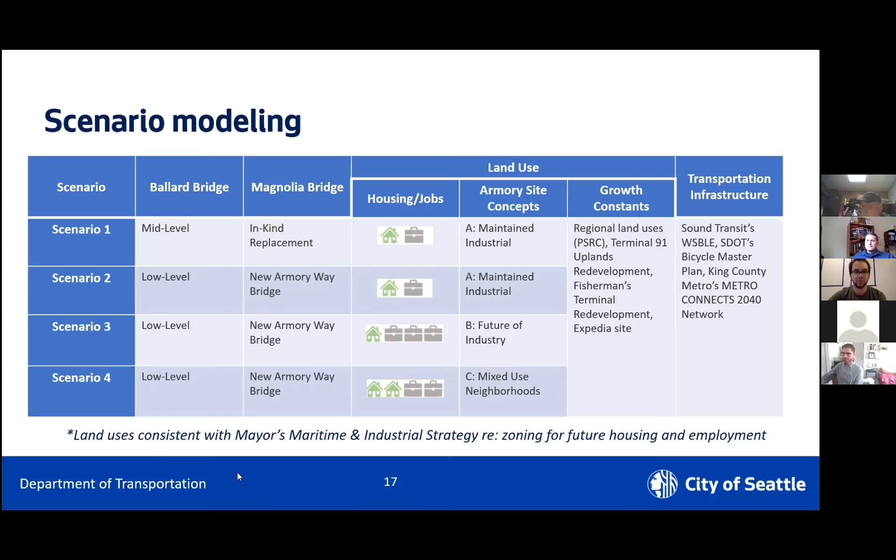Thanks, Diane. And Kendra, thanks for that quick overview. Eric, really appreciate you sharing the port's perspective on this as well. I think that's a helpful way to also frame what we're seeing in terms of the draft transportation recommendations. So Tom, I'm going to turn it over to you to walk through these recommendations, and then we'll have some more interagency team discussion as we go.

Yeah, thanks, Jennifer. And I'll be fairly quick on this section, since we have spoken with the IAT about a lot of what's here in our last meeting or two. Just kind of a heads up for when you get the report and have a chance to review that.

Within the recommendations chapter, we've bucketed recommendations into what we're calling key investments. This includes both the bridge options as well as some of the key multimodal investments that really rose to the top in terms of priority and need.

Because there's a lot of interest from specific modal stakeholders, both public and private, and because what we're really trying to do here is build a set of quality modal systems, we also present the recommendations by mode. So there's a bit of repetition in the report, you'll find, but we thought that was important so that a bike advocate or a freight advocate can look at the report and really understand how the BIRT recommendations are set up to improve or protect travel and access for that particular mode.

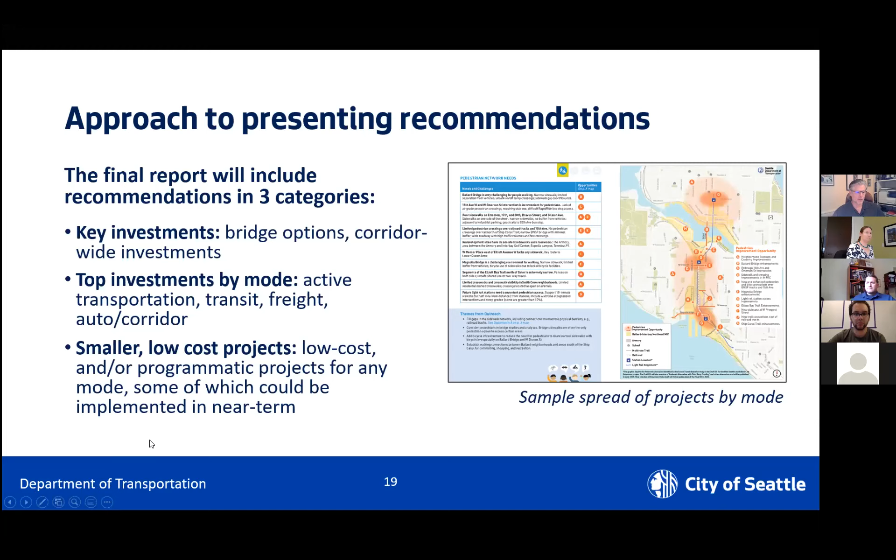Again, I think you guys have been through this process with us, so just a quick reminder that the recommendations in the report really come from a deliberative process where we started with a very long list of projects, worked closely with you to develop goals and clear evaluation criteria, worked through that technical process, including input directly from the IAT, as well as the public and various other stakeholder groups that we've been informed by. So the results you'll see in the report are reflective of what we feel to be a good process and a lot of both technical work as well as stakeholder and public input.

One of the things we wanted to be abundantly clear about at this point, since at the outset of this project there may have been some expectation that we would land with a single recommended replacement or rehab alternative for each of the two bridges, Ballard and Magnolia bridges. We did want to be clear that the report, as it's distributed to the legislature and the city council, and your various leadership, will continue to carry forward two alternatives for each bridge rehab or replacement.

As you know, planning studies have been either completed in the case of the Magnolia Bridge or are still underway, nearing completion for the Ballard Bridge, that looked at a range of alternatives, up to four alternatives for each replacement.

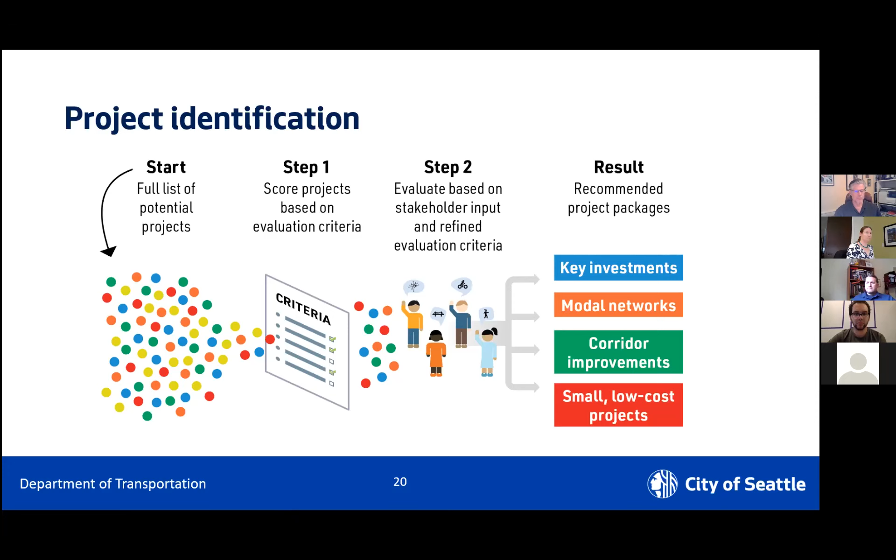So as we talked about in the past, the report is set up to talk about some of the trade-offs between each, and describe how the other suite of multimodal projects may or may not be related to these two alternatives. That may be a question in people's mind. We did want to be abundantly clear about that as you get the document to review and understand the context of the recommendations.

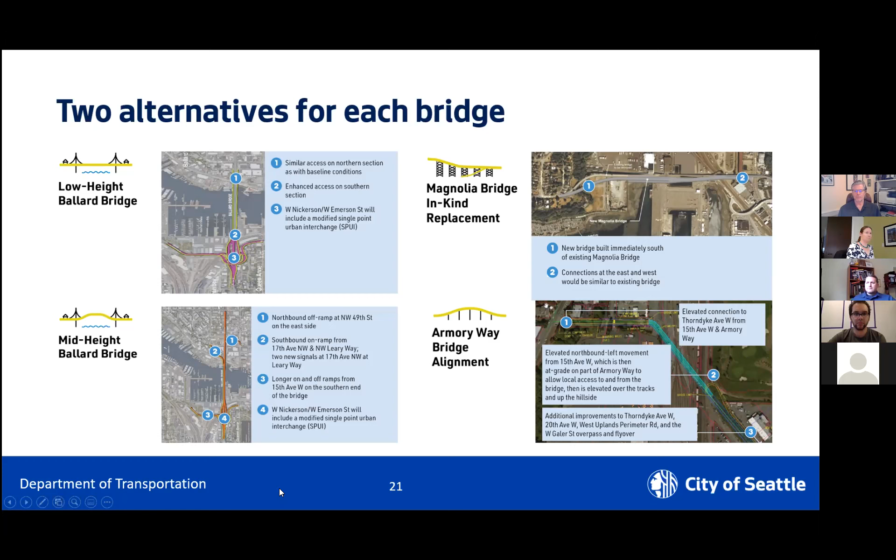Certainly the pedestrian improvements around the future station areas are critical. And while those station area projects may seem a bit far out yet, we know it takes time to implement some of these projects. So it's certainly worth planning for and beginning to make some of those pedestrian and bicycle improvements prior to the light rail project.

A couple of the key corridors that were really stressed through our technical and public process in terms of roadway improvements, which are really more comprehensive pedestrian quality and experiential improvements along more significant corridors, include the 14th Ave Northwest corridor, which will obviously be a really important corridor for pedestrian access to the Ballard station, where a lot of walk-up access is expected in a fairly dense neighborhood. And then also along the 15th Ave West corridor.

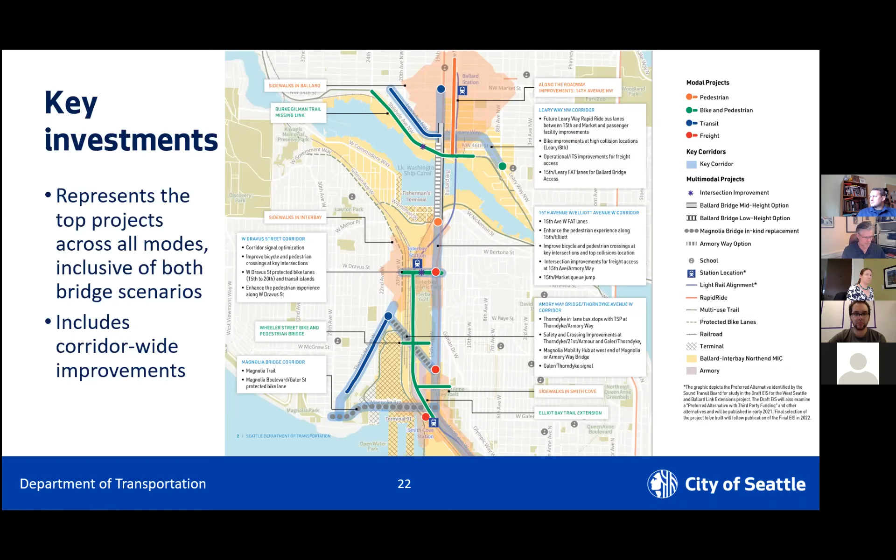Just quickly, to frame up how some of the bike and ped projects are framed, again, really focusing on those 10-minute walk buffers of the light rail stations, emphasizing some of the potential improvements along Dravus that could benefit cyclists and pedestrians.

One recommendation that the Fehr & Peers team evaluated quite extensively and thought would be beneficial to not only street operations, but to bikes and peds is the idea of a roundabout at Dravus and 17th Ave.

Talked about the Elliott Bay Trail extension. Another thing that came up extensively, which we want to emphasize in this plan, is the need for better ship canal crossings for cyclists. The plan includes two options: improvements to the Ballard Locks connection that would allow 24-hour cycle access, and what could be an interim or phased improvement to one of the Ballard Bridge alternatives, which is expansion of the deck to include a full-width bicycle facility crossing the Ballard Bridge.

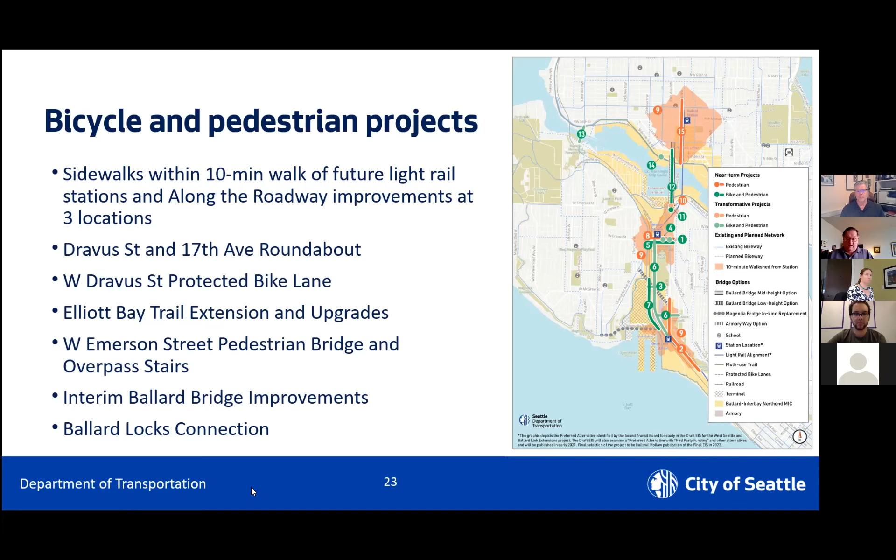Jeff, you want to jump to the next slide? There you go. So again, in terms of some of the key transit and freight projects, 15th Ave Northeast and Market is an area where we see a lot of congestion, so we're looking at some queue jumps for transit there.

Building on some of the work the city's doing on Route 40, those bus lanes we talked about, there's a few transit improvements that would be tied to the Armory Way alternative along Thorndyke, both for transit priority as well as connectivity to those modes. We talked a bit about Dravus as a corridor that really could use reliability improvements, so we're looking at both signal operations as well as potential for a longer-term bridge replacement.

We continue to move forward with the recommendation of freight and transit lanes on 15th Ave West as an opportunity to provide some priority for trucks along that corridor, shared with transit. And then there's a host of intersection improvements that could include signal opportunities to improve both freight and transit throughput.

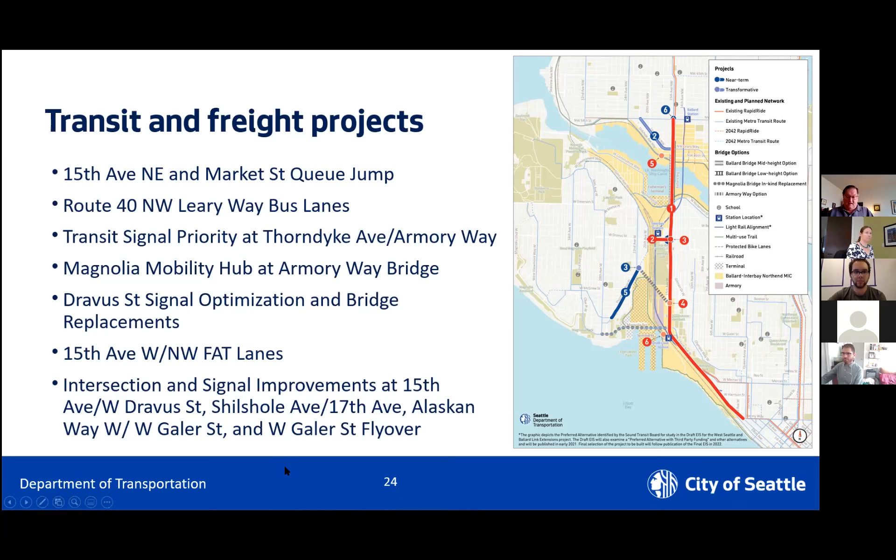And then I think we talked a little bit about some of the small, low-cost projects. I won't go through these all in detail, but a lot of these bring a little more specificity to some of the pedestrian crossing, safety, and signalization improvements within the station areas, as well as along some of the more heavily trafficked corridors where crossings can be challenging, like 15th Ave West.

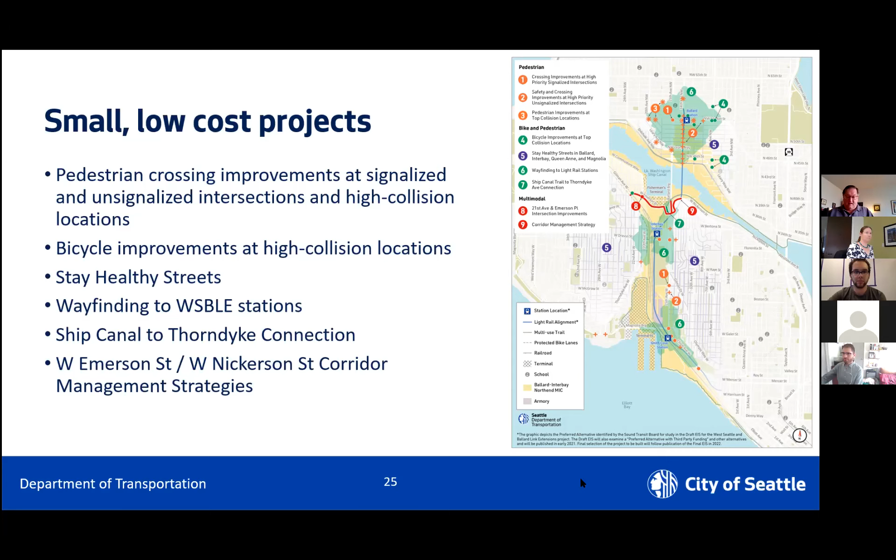And then, one corridor that we included in this small, low-cost category is Emerson Nickerson Street. This is obviously an important corridor for freight and goods movement, and there's a series of smaller ITS and signalization projects that, in combination, could really help improve freight reliability along this important east-west corridor.

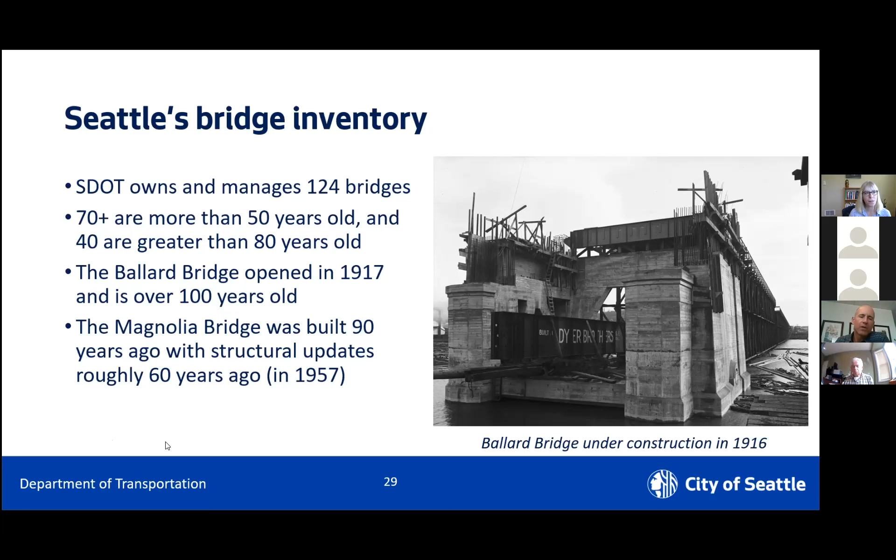Obviously, on top of that, nobody would have expected that the West Seattle High Bridge would be closed at this point. That is an emergency condition for the city and many of its partners. SDOT is putting a tremendous amount of resource into working to find a solution either to repair or replace that bridge, and that will put a tremendous amount of funding stress on the city. The city's already had to take out a $70 million interagency loan to pay for some of those activities and does not have funding identified for that repair or replacement. So it is really hard at work identifying solutions for paying for that important water crossing of the Duwamish.

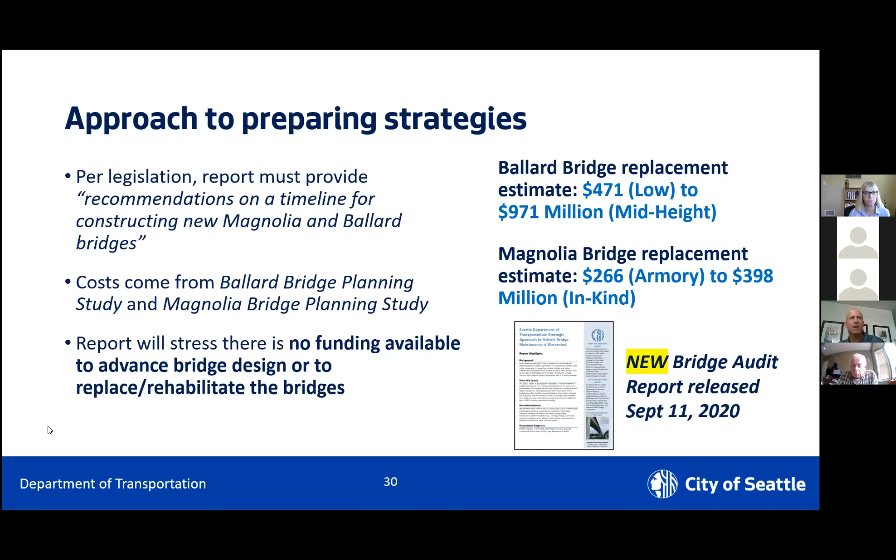So all that's a little context around what we're doing here in the BIRT study, which per the legislation is to provide some recommendations for both a timeline and a strategy for funding the replacement or rehabilitation of the Magnolia and Ballard bridges. And again, these are very expensive capital projects. I think if you look at the typical types of major infrastructure projects that the city has dealt with over the last decade or two, there's very few that rise to the level of investment that is required based on either the Ballard Bridge or the Magnolia Bridge replacement costing in those planning studies.

Then there's quite a bit of engineering work, often split up into three or four different phases: 30% design, 60% design, et cetera. There's an environmental process that would run parallel to that engineering. There's a process to bring on contractors for construction. There's right-of-way acquisition—often even with bridge replacements, different ramp locations, different bridge sizes, expansion can still require acquisition of right-of-way. And then there's the process of actually building or rehabbing, but sometimes that's the lesser of the time to get through these processes.

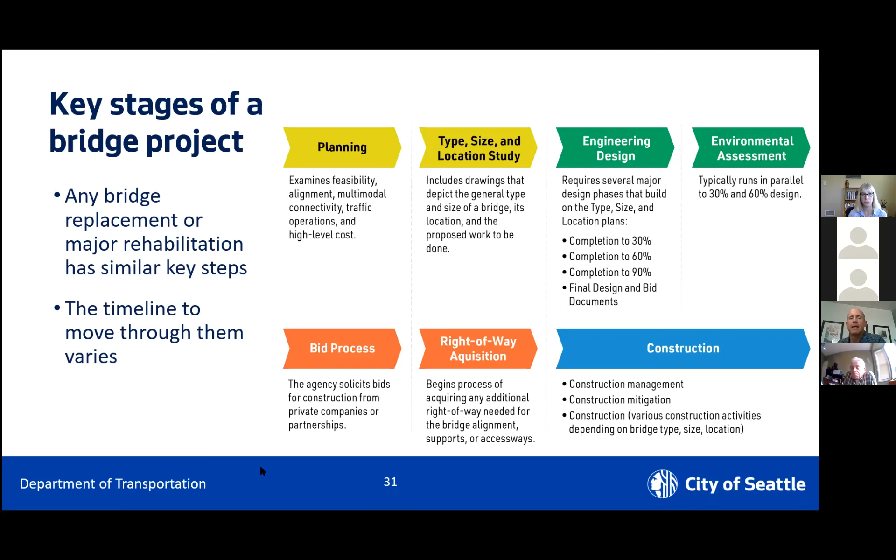So as we look through this, we'll show you some graphics that we're working on to demonstrate cost and time frame for each of the bridge alternatives. I think it's important to recognize that there are some differences between the two alternatives in how or whether it's possible to phase the replacement or rehabilitation.

With both sets of options, there are certainly some differences. With the Ballard Bridge, the mid-level alternative is a full replacement of that bridge, so that's not an alternative that can be phased. In other words, you couldn't fund incremental elements and build them. You'd ultimately need full construction funding to complete that project. With the low level rehabilitation, that's not necessarily the case.

Those improvements could be made in phases, and there's some different options for that. Just to provide some examples of what that might look like, the pedestrian and bicycle cantilevers from that bridge could potentially be an early phase of development. That's a priority out of this process.

The planned interchange at the south end of the bridge is a major component of that project that could potentially be done incrementally, and some of the bridge approaches could be built incrementally. So that certainly is a major difference in terms of the ability to fund and implement that project incrementally.

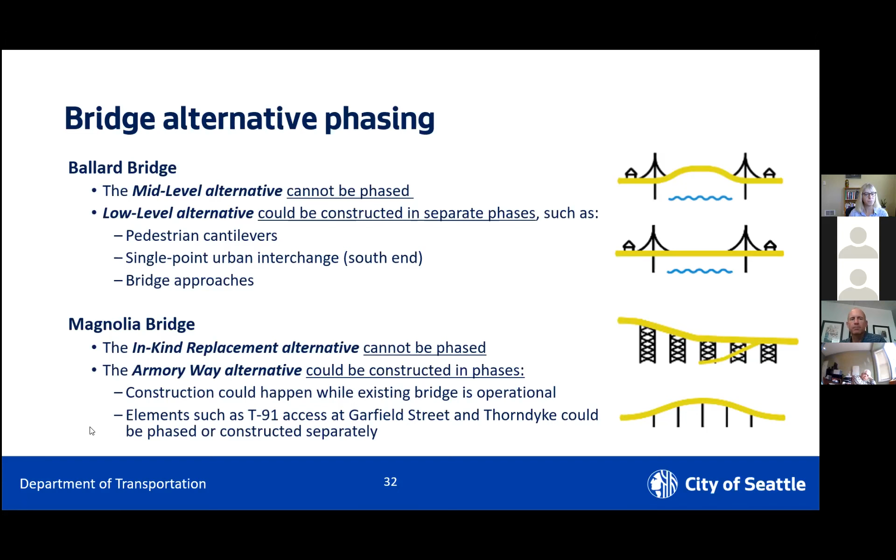Given the financial position the city's in, where there's not money for any of these phases currently, the thing to stress is that we don't necessarily need all the funding, full construction, planning and design costs to start these processes. Each of these individual steps can be funded sequentially.

For example, if we need $5 to $7 million for a type, size, and location study, that is a pot of funding that could be developed through various local and grant sources to commence that stage of work.

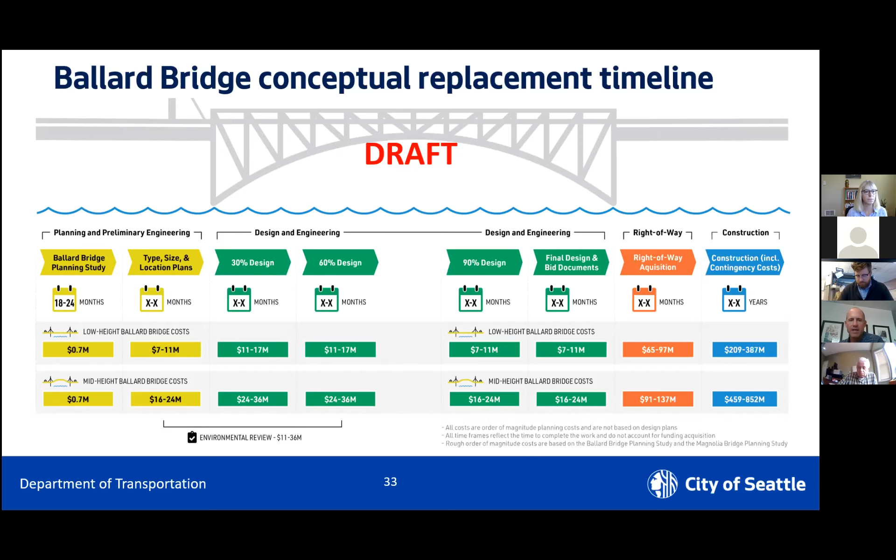Tom, one question that has come up, and I don't know if you're able to answer this, or maybe Kendra could chime in. I think there may have been a previous type, size, location study done for the Magnolia Bridge, post-earthquake, when there was an assessment of damage. Does anybody know if that would need to be redone, or any status on that? We can certainly follow up on it. I just wanted to check.

I'm muted here, I'll take that. Kendra, go ahead. There's a preponderance of studies that we've reviewed. I'm looking at all the ones we have for Magnolia. There are some of that magnitude. I can't recall exactly all of them, but as part of the study, we looked all the way back to 2000 at different documents.

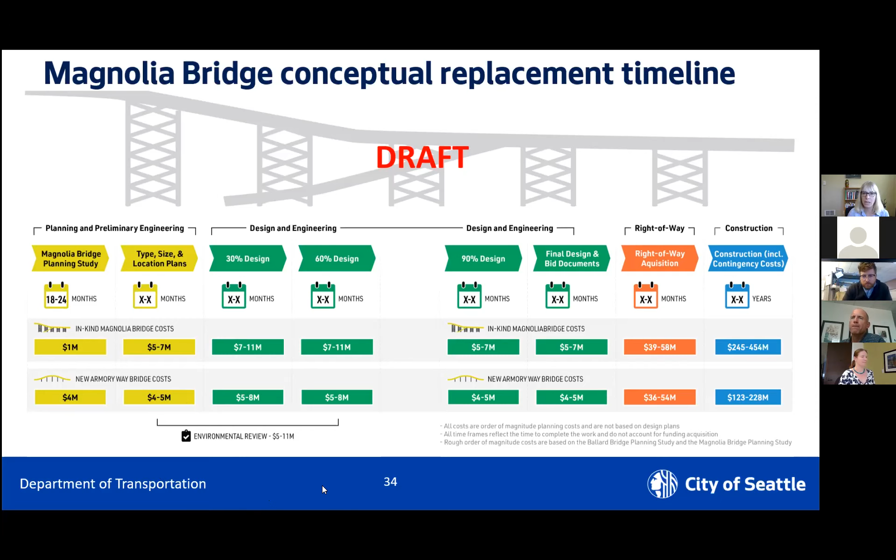Okay, great, that's sort of what I was thinking as well, but just wanted to ask, and we can certainly follow up and clarify on that a little bit more. So that may mean we have a couple of steps less to do in some cases, but may need to do them again. Mm-hmm. Okay, great. Go ahead, Tom. Thanks.

In terms of funding, one of the things that's clear is that for both of these projects, SDOT is going to need to pursue local, regional, state, and federal sources to fund this type of project. Bridge funding tends to be complex and multi-dimensional.

So partnerships with state and federal partners, as well as local partners, are going to be absolutely critical in this work. I think it's really important to reflect that a key piece of this study is to emphasize to the state the need for state participation in funding these important infrastructure projects. The state or the city is looking at these projects through the lens of a number of bridge infrastructure needs.

As we've spoken to folks at the city, and certainly as we talked to some of the partners on this call, including the port, they have stressed that the West Seattle High Bridge replacement and tackling that crossing of the Duwamish is really a top priority. In talking to Eric's colleague Jerry, she said these are very much the types of projects that the port has a history of supporting, but right now we're pretty laser focused on working with the city to help address the Duwamish crossing and some of the impacts that accrue to the manufacturing industrial center there. So I think those are important things to recognize.

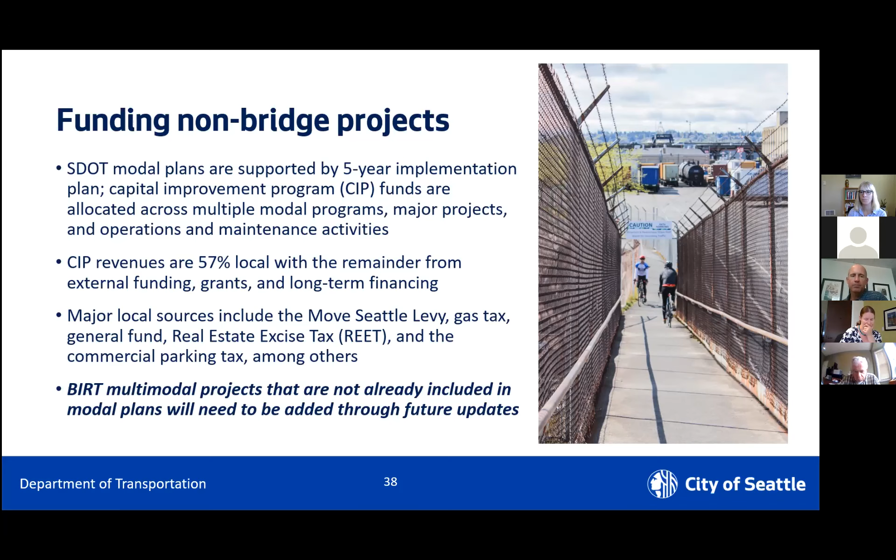Not everything in this plan is a bridge, so I want to talk about funding non-bridge projects. Because this is a legislatively directed special project, some of the bike, pedestrian, and transit projects that come out of this will need to be integrated and reconciled with the City of Seattle's transportation planning process, which typically develops and updates modal plans that then direct a 5-year implementation program. For projects recommended through the BIRT that aren't part of existing modal plans, there'll be reconciliation through the modal plan update processes to get those integrated and aligned with citywide needs.

Good, okay, all right, great. Thank you, that's a lot.

It's a lot of information, both in terms of the different steps involved in a bridge rehabilitation or replacement, and also a lot to consider in terms of funding sources. As Tom noted, there are always competing priorities for funding, but particularly now, with the West Seattle Bridge at the forefront of a lot of these conversations, the competition is even fiercer. So we've got a couple of minutes to hear from our interagency team members, both on the assumptions we've shared and any initial thoughts on the funding sources or partnership opportunities we've teed up.

I know Eric had to leave us, so let's see—I won't pick on him first. Travis, any thoughts from WSDOT?

Talking about the state as a whole, there are a lot of cities, both intrastate and nationally, that are really hurting right now. A lot of us are funded with gas tax revenue, and WSDOT's budget has taken a heck of a hit, so we're reprioritizing projects. The more we can talk about the overall needs with a single voice and stay coordinated, the better chance we'll have of seeing projects like this get funding in the future. That's probably not going to be temporary—the recovery is going to be at least a multi-year effort. Even past the West Seattle Bridge timeline, the more coordinated we can be, the better.